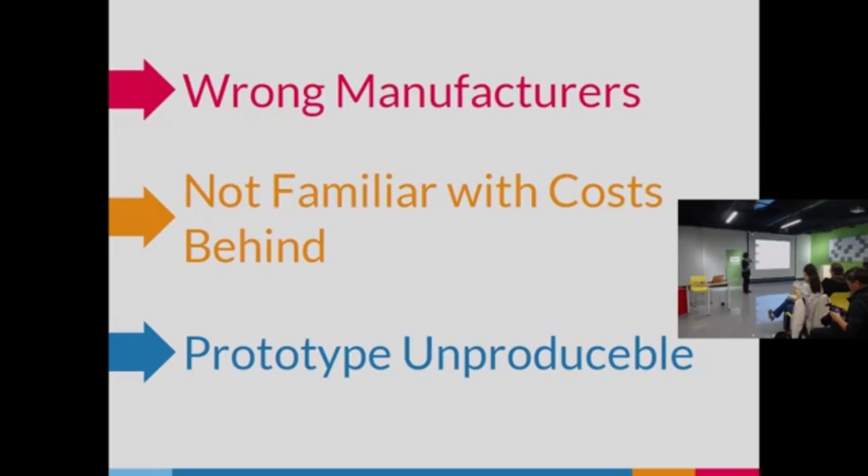There are a few possible reasons. They actually start with a small team, so from the first place they find the wrong manufacturers, they are not a good match. They are small scale, but looking for a large OEM, ODM, so it's easy for your project not to be supported. Or because the manufacturing process is unfamiliar from the start, they don't know the hidden costs behind it. Or even when they do the prototype, because prototype is not equal to manufacturing, the prototype probably will not be producible.

It's all about the scale differences. Usually starting with small teams, or they have few people, probably only focused on software, so they don't have the skill to do full stack engineering to support their hardware projects. That's why you need to find a good supplier who is actually your partner, and not just your service provider—treat them as a partner. They are the ones who control your cost, quality, and schedule.

So, having the hope that your innovation or your product will be the next big thing, what we suggest is to involve those hardware partners at an early stage, so you get better visibility on your projects. You get a next big quality product to be delivered in the market, and try to build a long-term relationship with your suppliers, because they are your first customer.

In Triple, we connect hardware startups to find different suppliers and outsourcing partners, depending on what stage you are in. If you purely have your own in-house design and are looking for OEM, ODM, we can find suppliers to fit your needs. Or if you need support to design your product, or even if you only have an idea and are looking for suppliers to do consulting or manage the rest of the project for you, we can dig out what kind of requirement or status you are in, and help you find the one that fits your needs.

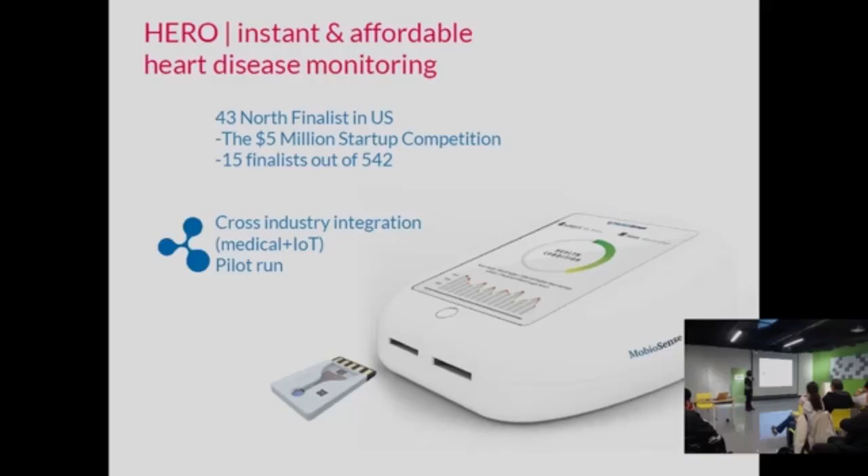And there's panoramic videos funded on Kickstarter. And there's French teams doing relaxation headsets. That's the portable heart disease monitoring; we helped them find the supplier for the chip. And there's a dart machine, transforming the traditional dart machine by adding a digital scoring system inside.

And that's the most important case I want to share with you. That's the Space Case, the most advanced smart suitcase. It's got biolock, self-scale, global tracking of your luggage, power bank, Bluetooth speakers, anti-theft function, app, and the cloud. On Kickstarter it got 920,000 pledged. And the Taiwan supplier helped them do the system integration all the way from the marketing concept to the final product. So I want to share with you a little bit about this story.

As I mentioned in the previous slide, it was very successful on Kickstarter. And that's also our first overseas case in Triple when we just started. The founders were doing traditional suitcases, but they wanted to add IoT or digital functions into their suitcase. But when our PM found this project and approached them, they had only marketing features and nothing else. So they were actually looking for a supplier to do the actual work. So they came to us, bought the ticket and visited Taiwan. Our PM helped them manage the meetings and talk to different parties.

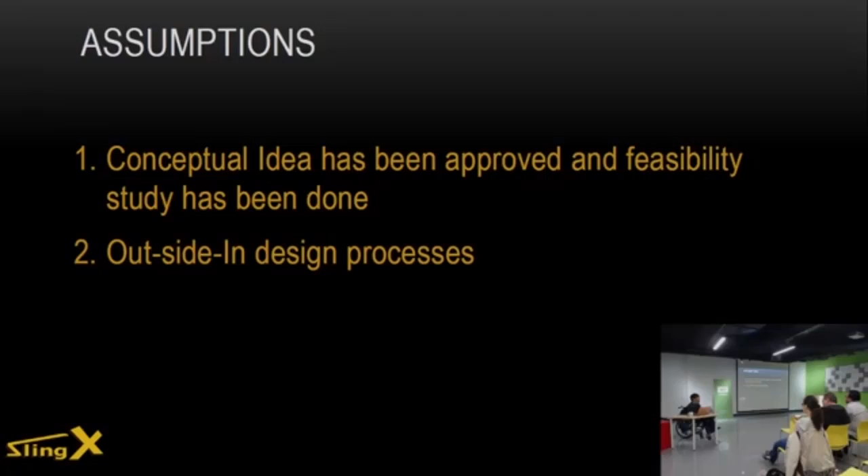But inside-out is just the contrary. We have the PCB board first. We test it and do some PoC concept, and then based on this we generate our look. Most makers take this because they like to use, for example, the Raspberry Pi or Arduino to test their concept. Then based on those modules, they try to make an ID that fits the board. But today, for the normal design process, we will use outside-in.

Okay, and this, oh, sorry.

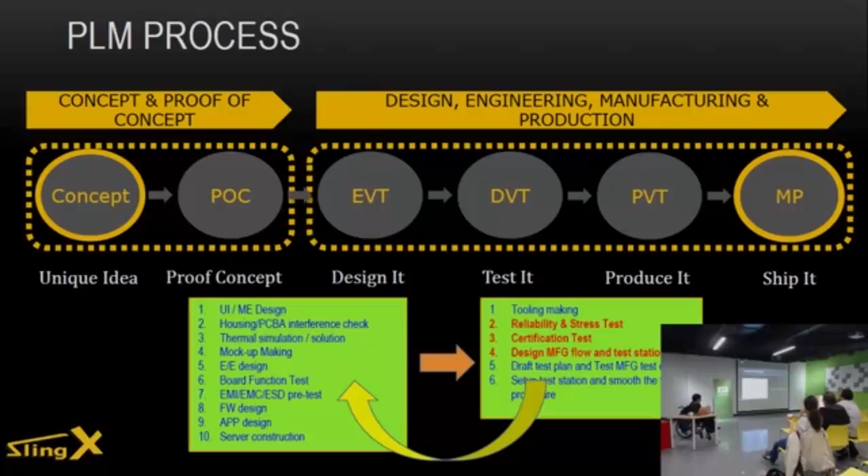I believe most of you have seen this process already, right? Some of you should be very familiar with this process, because everybody in such a session will tell you, when you design a product, you must obey this process. But this is only a process. They didn't tell you how to do that, right? You can follow PoC, EVT, DVT, PVT, but it means nothing. It just means some action. But how to do this action?

Okay, this is some action that we have to take from PoC to EVT, and this is some action to go to DVT and PVT. But right here, I want to ask one question to all of you. What's your main purpose when you design a product? Can someone tell me? Hannah, can you tell me what's your purpose when you design a product?

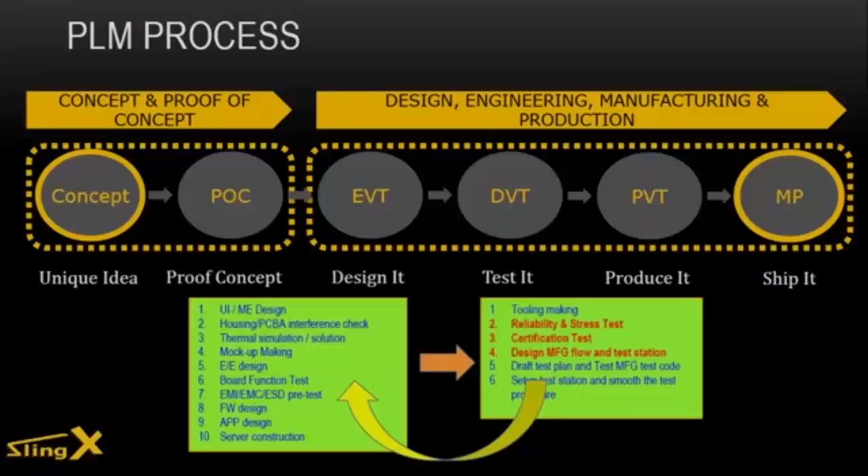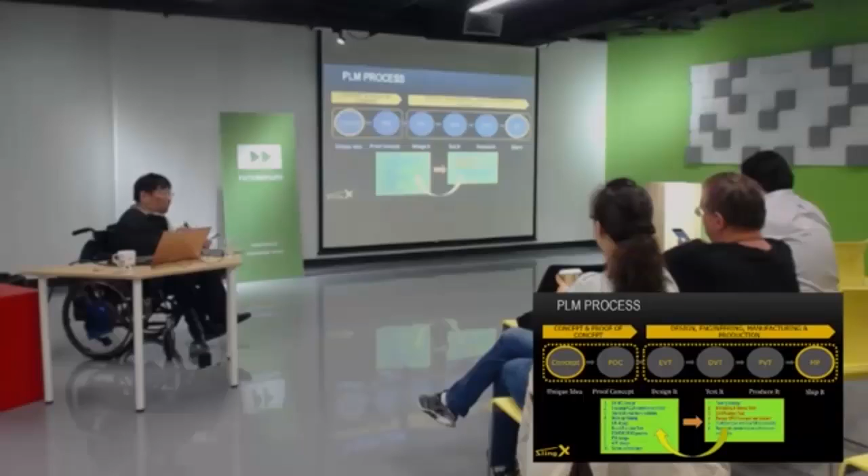So these two items, I think, are the most important for the whole design cycle. So I want to trace back from these two items, or even three items, from the manufacturer side and the market, and look back at how you design your product, and what's the major issue when you're designing a product.

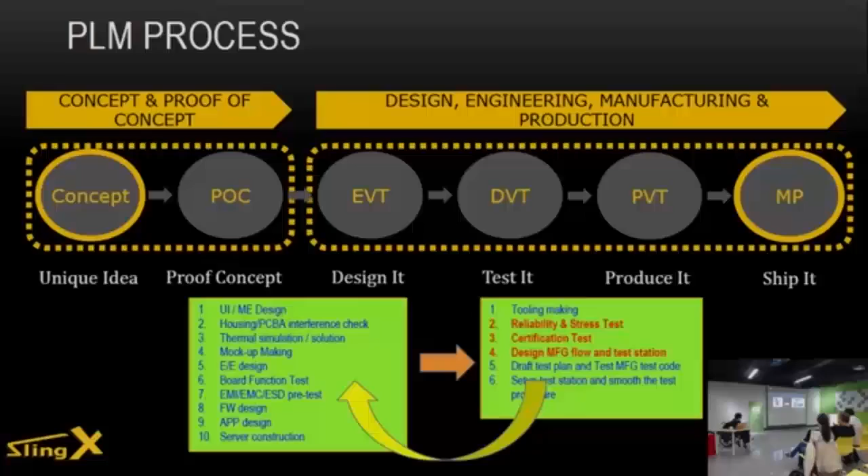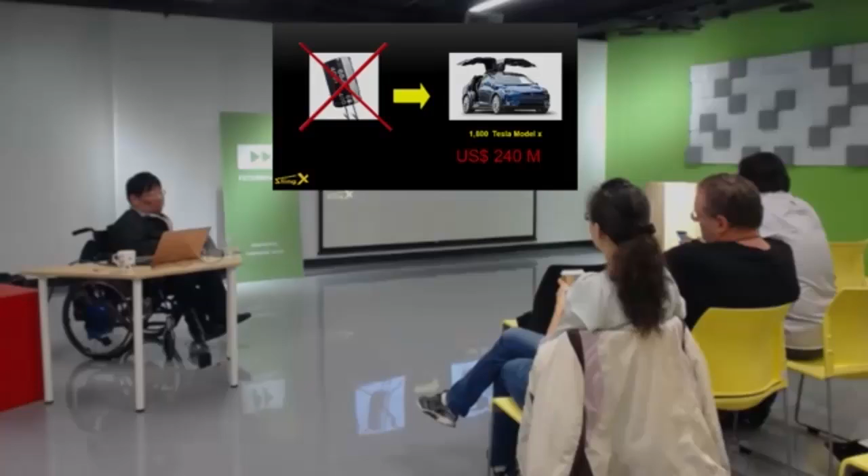Yeah. So Foxconn was fined 240 million that year. And one senior vice general manager almost quit just for this issue.

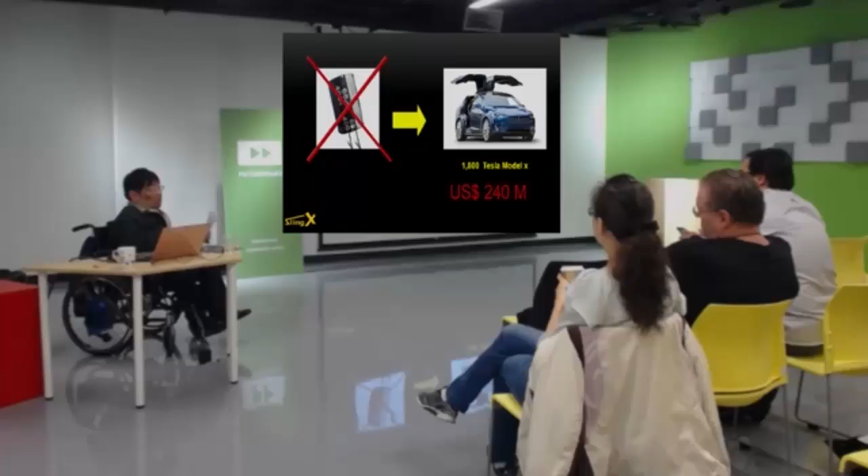And this means, because this is a concern: before shipping, we will do some reliability tests, especially thermal tests and component life tests. But for this event, at that time, Foxconn did not test this component very well. And so they got this issue after half a year. Yeah.

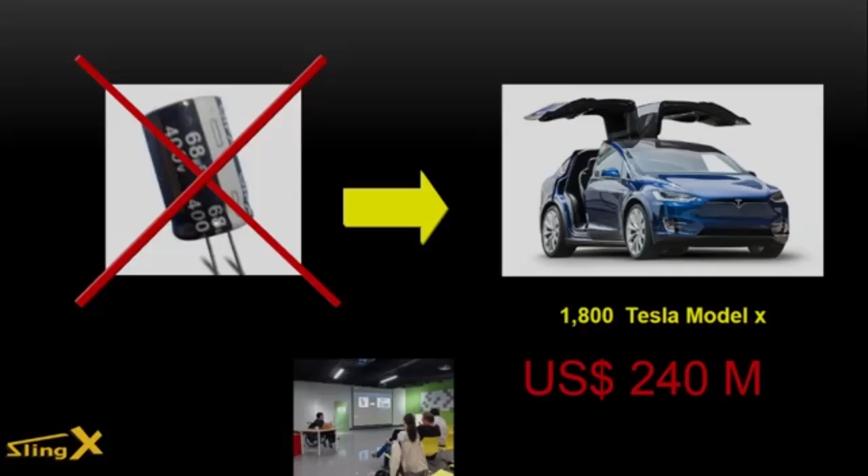Okay, let's go to the main topic. Oh, sorry. Okay, so this is what I want to discuss with you from these aspects in the design process. When you're designing a product, each item of this aspect could be a major topic to discuss for maybe one day. So today I just want to give a general scope to all of you, what we think about in designing a product, what is most important and how to think about it. Okay.

Now from here, okay. Sorry.

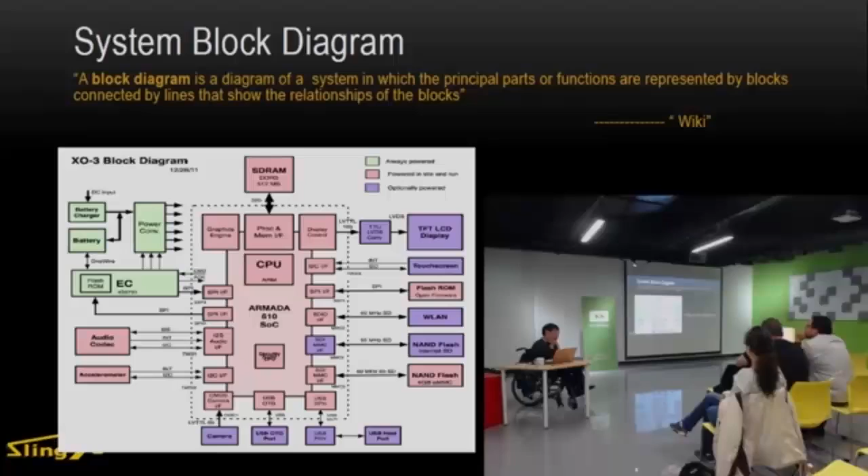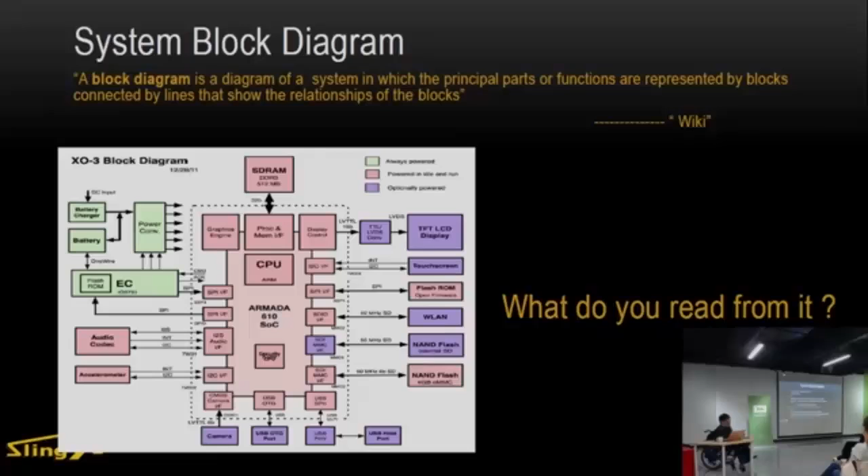First, when you design a product, you must generate a system block diagram. Why? Wait a moment, I forget. Yeah, let me see. Okay. Because when you see this block diagram, what can you read from this diagram? I think you can read at least some items listed right here.

You can list the function of each block, right? You can see right here. Here is the function of each block, and you can also see the interface, how those blocks connect, and how those blocks work with each other. And you can also see how the power goes.

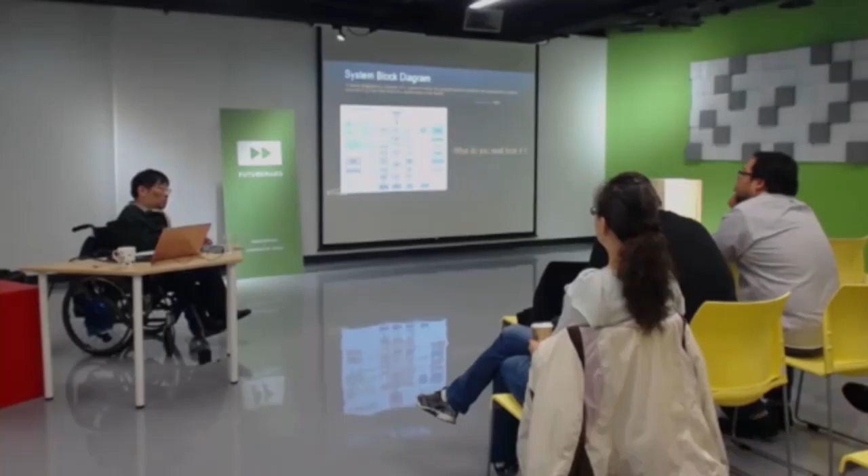So you can see the voltage, because we use different colors to show different working voltages on this system block. So it is very clear for you to talk with your engineering guys. And you can even use this block diagram to discuss with your mechanical guys, because when you design a system, the mechanical guys need to know where to put those I/O interfaces. So we can use this to talk with them about how to place them and generate a general scope of a device.

And also, you can use this block diagram to list your power budget. When we design a product, the power budget is very important to us because we need to provide sufficient power to the whole system. Otherwise, you have to do what we call an engineering change when you find out the power is not enough for your system.

This case is especially easy to find in communication systems, for example a 3G system, because for a 3G system the power consumption depends on how clear the signal is. If the signal is not so clear, it will use more power to communicate with the base station, so at that time it will consume more power. But if your power budget is not enough, you will find the system may shut down or you cannot even link.

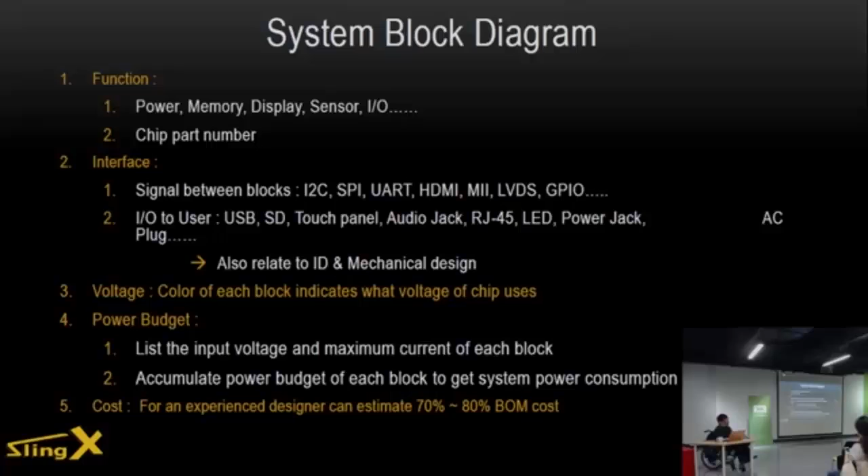The other use is when you want to have a general understanding of your cost. I think this diagram also can help you. Because by my habit, I will also list some component costs on this block diagram. So when someone asks you how much the cost of your system is, you can make a general calculation.

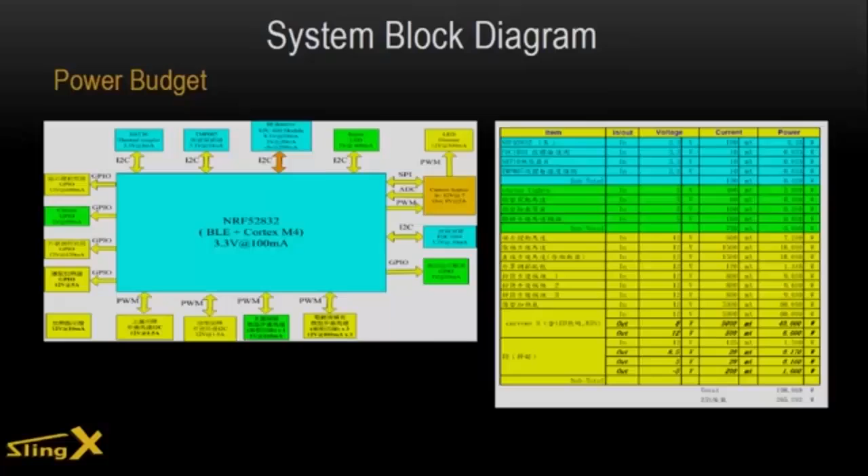This is one system block diagram. You can see the functions and the chips for each function, and we also list the power consumption right here and translate it into this table, so you can clearly know your power budget. You can even check, for example, the interfaces right here, and use this to calculate whether your system can support so many interfaces.

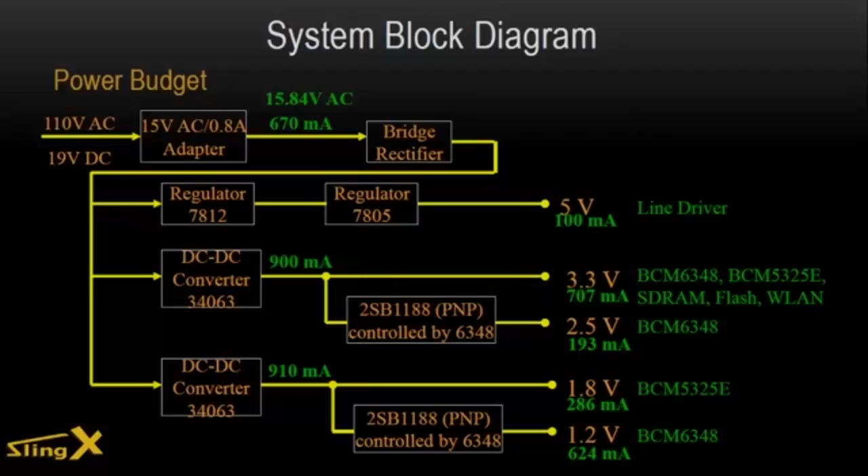This is another power budget format. This is more clear. Using this, you can even calculate the efficiency of your power system, because the power system efficiency will dominate the product's thermal performance. And for thermal, we will talk about it later.

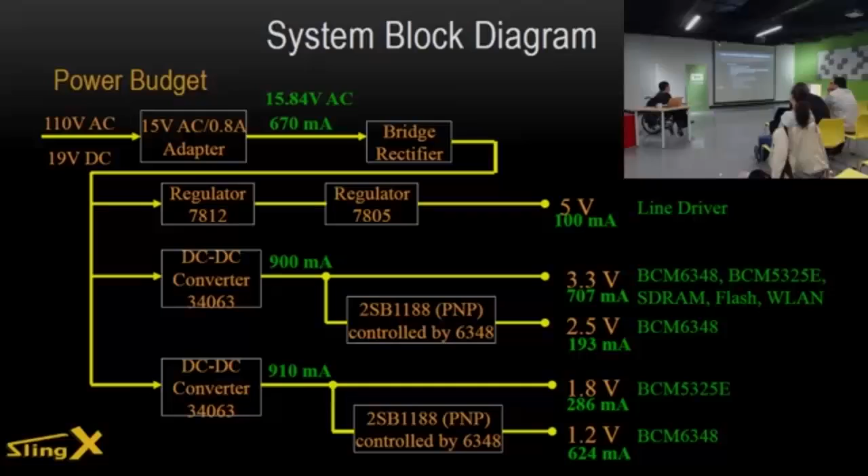Okay, this is the second chapter, usage environment. Basically, we are talking about reliability. Because the environment where the product is used will determine what kind of tests you need when you're designing a product. For example, just imagine that you live somewhere near the seashore, for example, maybe Dubai.

You live there and maybe you're running there, and have a mobile phone, just talking, or some other device. So I just want to ask you, what kind of tests do you think those devices should go through? It is very hot and close to the sea. So maybe you need to have some tests about temperature and humidity, right?

And because it's near the seashore, you will even need to do what we call a salt spray test, just to test whether the device can endure such a salty environment. And this is the environment test. This spec comes from the S company, a Japanese company.

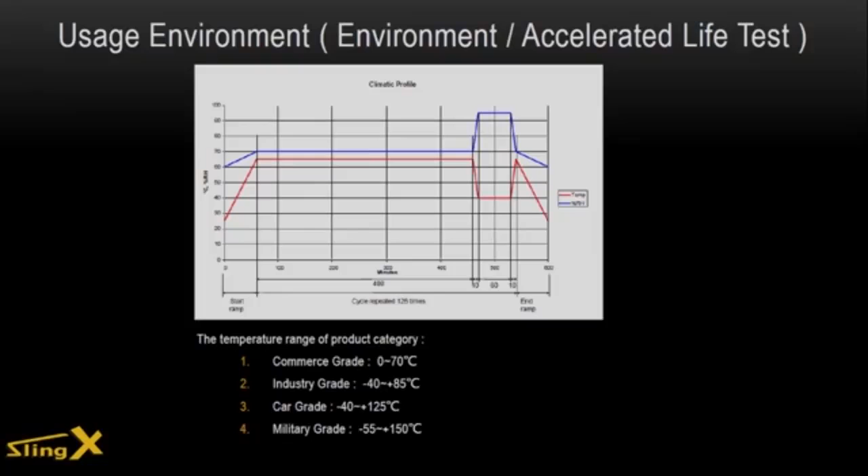Okay, right here. I also want to have some short introduction about some product categories, depending on the temperature. One is the commercial grade, and the others are the industry grade, the car grade, and the military grade. Yeah, these are the 4 kinds of product category.

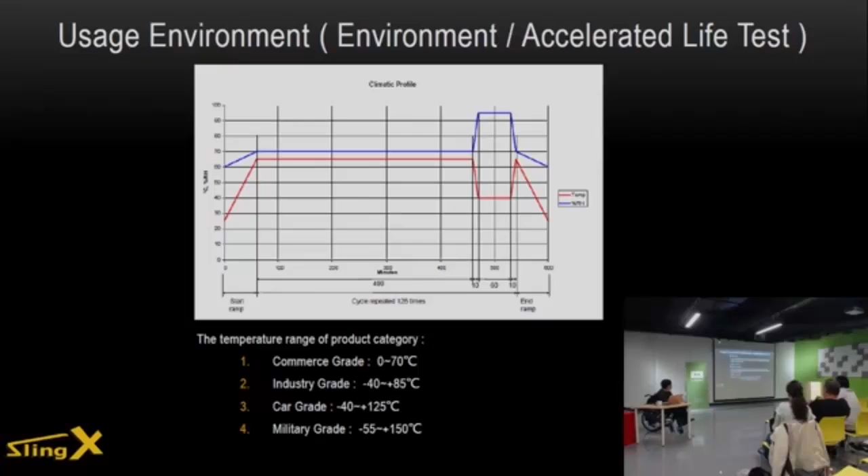And next, this is what we call a salt spray test. This is just an accelerated corrosion that produces a corrosion attack on coating samples to see whether the surface will be impacted or corroded by salt. And the next is waterproof and dustproof.

I think some of you will be very familiar with this spec, because most mobile phones right now emphasize that the phone is waterproof, or even that it can be immersed or used underwater. So they must pass this test. And for this test, we call it the IP rating.

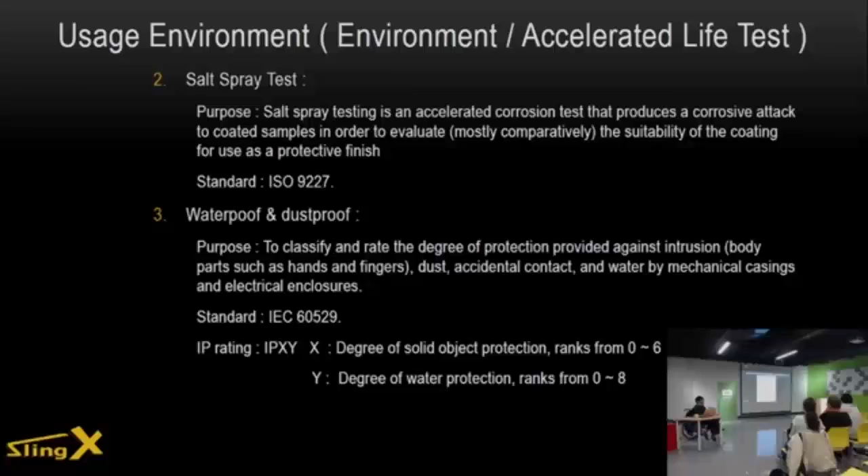For example, some Sony mobile phones are IP67. For IP67, the first number is for dustproof, and the second number is for waterproof. IP67 means no dust can get in, and it can be put underwater at 1 meter for at least 30 minutes. So we have to do a lot of such tests.

So when you design a product, your system architect should know what kind of environment this product will be sold in, and then define the environment, what kind of reliability, and what kind of tests this product should take. After you get all of that information, you can pass it to the designer, who then knows how to design your product. Otherwise, if you don't have such information, you will redesign your product many times, waste your time, waste your money, and even lose your customer.

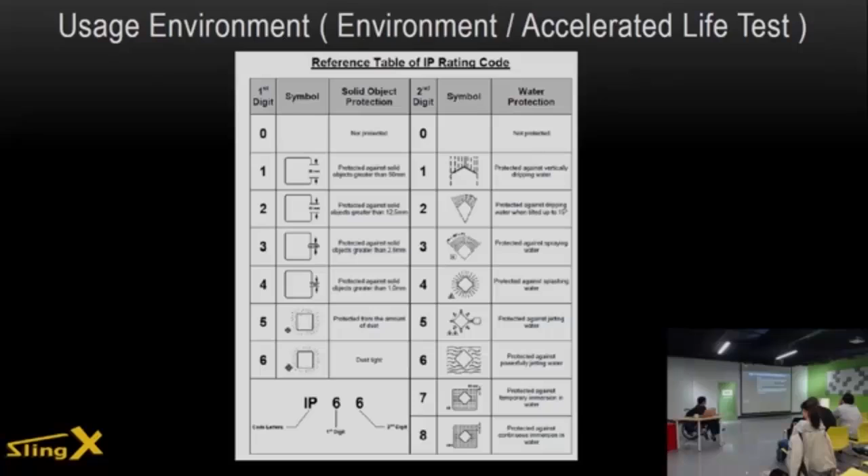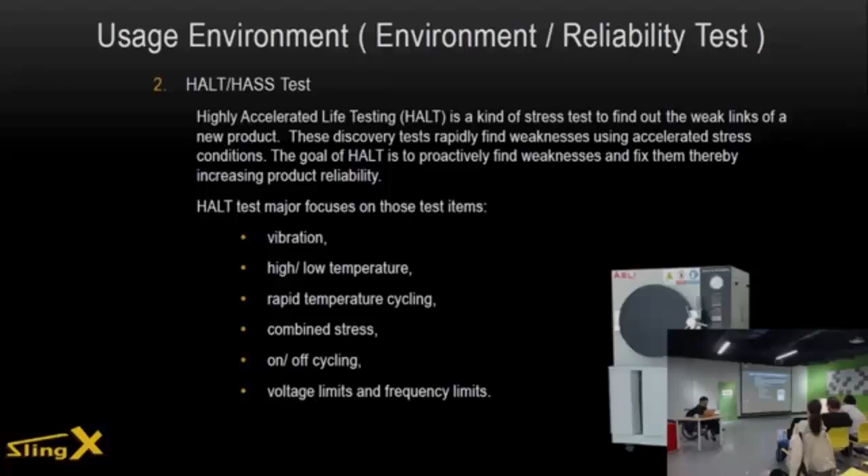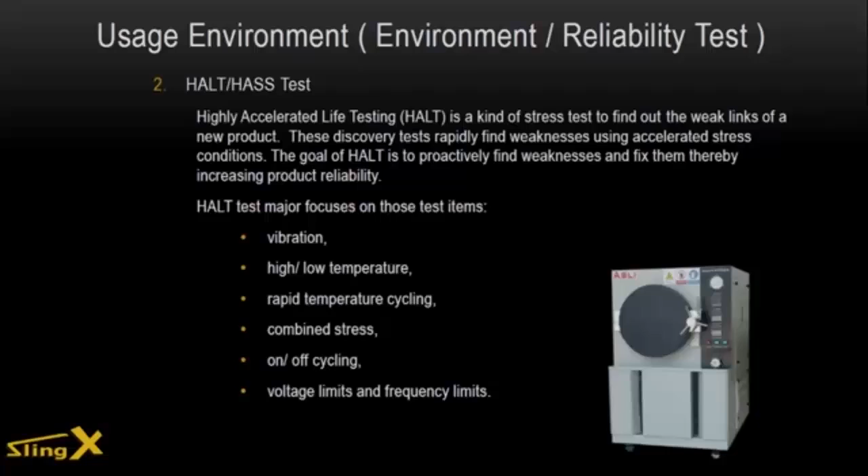Okay, this is what we call a HALT test. This test is different from the previous ones, because the previous tests are all done separately, but this is a combination test. The purpose of the HALT test is to speed up your test time. For example, temperature cycling tests sometimes take almost 1 month.

But when we design a product, as you know, the timing is shorter and shorter than before. So we are unable to endure a test that takes 1 month. We hope we can do it within just a few days, at most 1 week. So we have this HALT test to speed up your testing, and it combines vibration, high and low temperature, and even on-off cycling together, so that you can do a lot of tests at one time.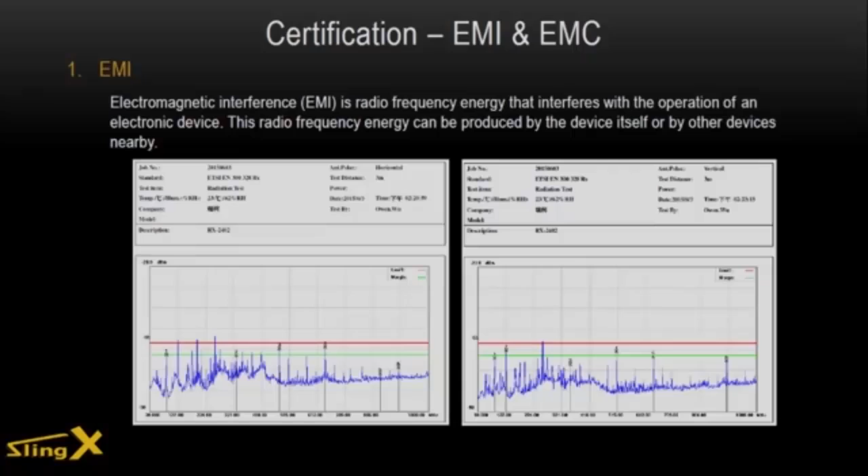This is EMI, which we call EMI. Basically, it is a radio frequency energy that will interfere with other devices. For example, any electrical device that has some frequency operating in their system must generate some radiation, a frequency radiation. So those frequencies will impact other devices. So the EMI, FCC EMI, is just trying to keep under their spec to prevent you from interfering with other devices.

So on this chart, you can see there are two lines. The red line is the upper limit, and the green line is the tolerance. Once your radio frequency is above the red line, this device will fail, and you have to try to minimize the intensity of this radio frequency to pass the test.

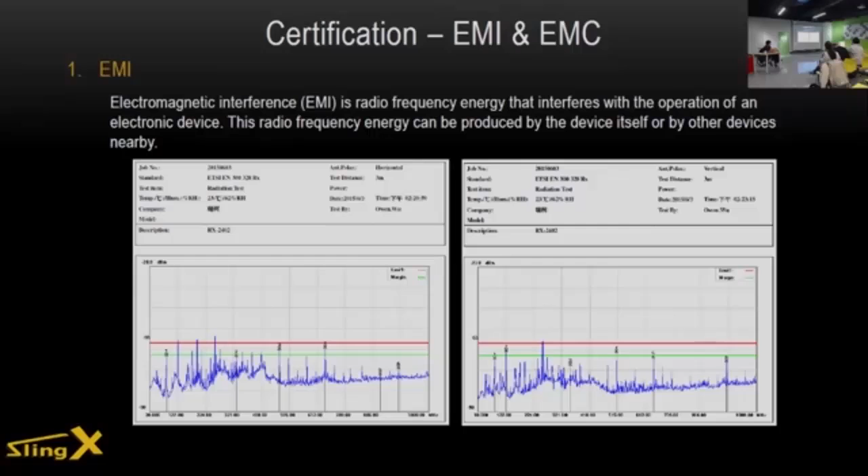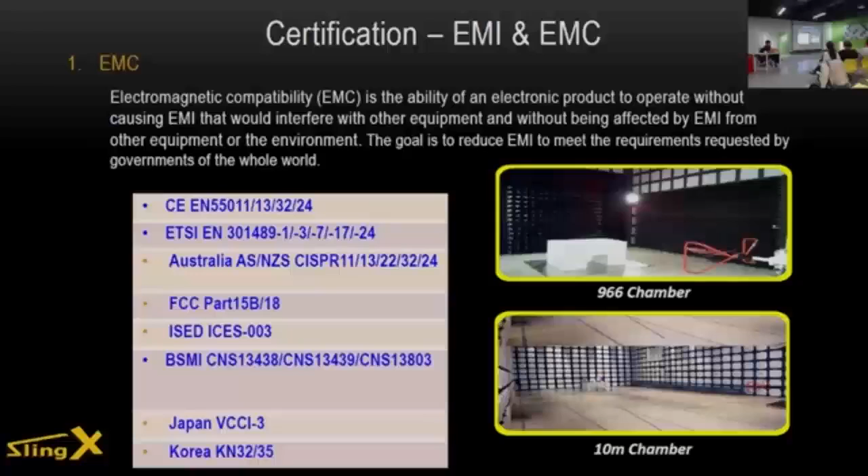This is some EMI, EMC. This is what we call a 3-meter chamber and the 10-meter chamber, and here is the standard for different countries for EMI and EMC. For Taiwan, this is Taiwan BSMI, and for US this is FCC Part 15B and 15C. It has two kinds of different specs.

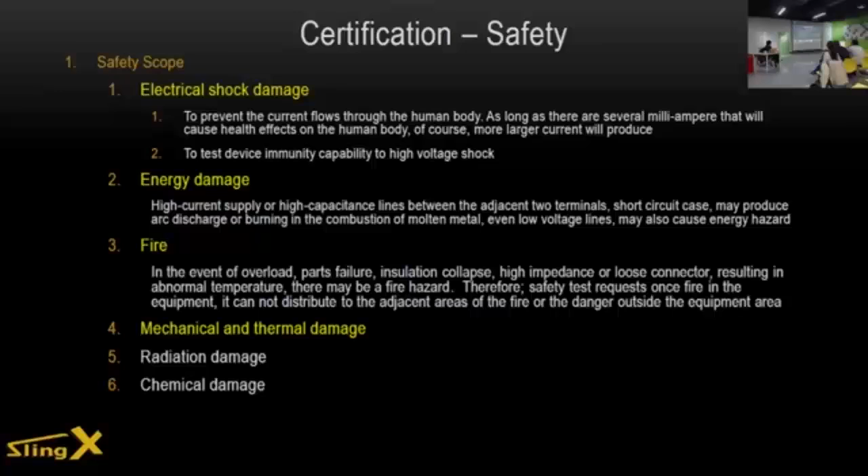And also it has some scope for mechanical and thermal damage. This is the safety sub-spec of the test standard for safety all over the world for different countries.

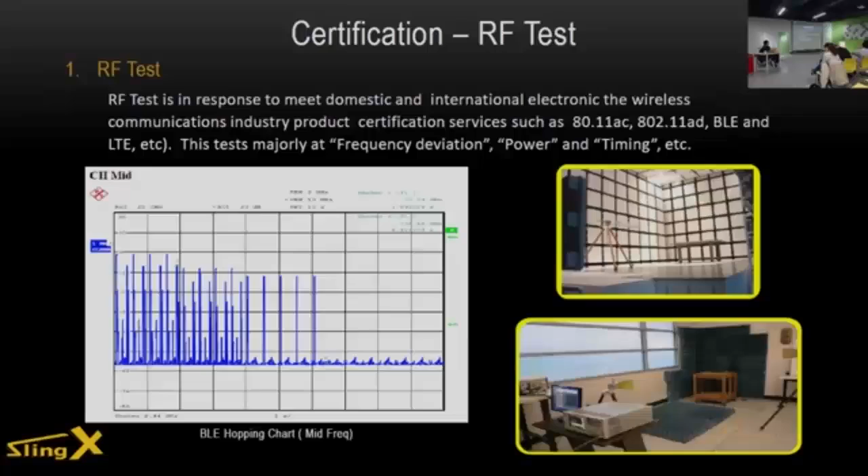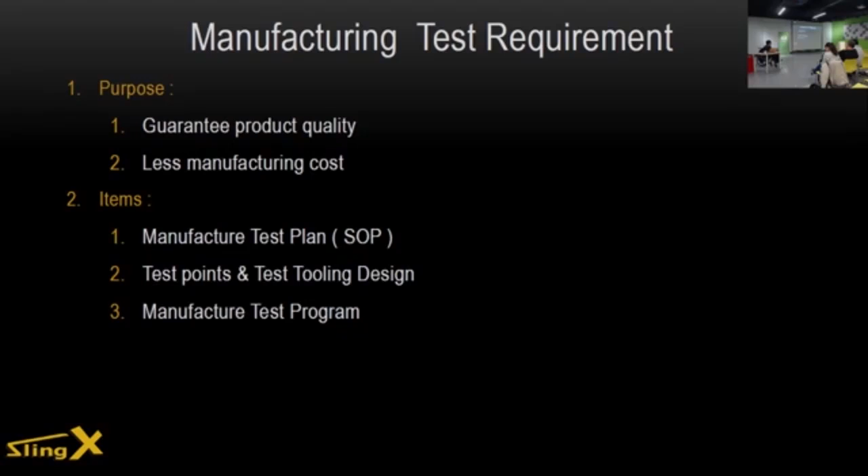Next is another important topic for you to design your product, and we will also take this into consideration in advance. This is about manufacture. When you design a system, you must know how to manufacture your product.

If you cannot put this into your consideration as early as possible, maybe after you finish testing your boards and all the functions work well, you will find one thing: it is very hard to produce at a production line. Then you must do some change so that for the production line, it can save time and process, and be smooth for them to produce.

So this is very important for you to take into consideration. For example, the purpose of this includes two items: one is to guarantee your product quality, and the other is to lessen your manufacturing cost.

For these items, basically we will have 3 items. One is SOP, which we call the manufacturer test plan. The other is what we call the test points and the test tooling design, and later we will have examples to show you. The third item is the manufacturer test program.

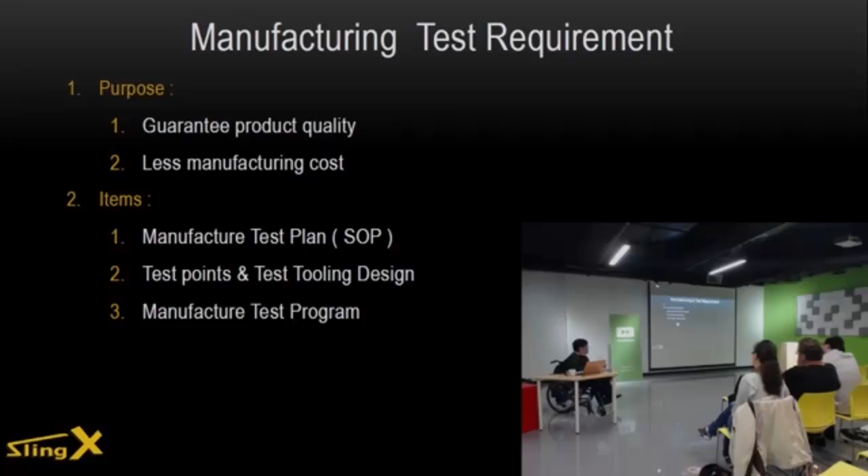And for the SOP—hello? Can someone just show this PDF file?

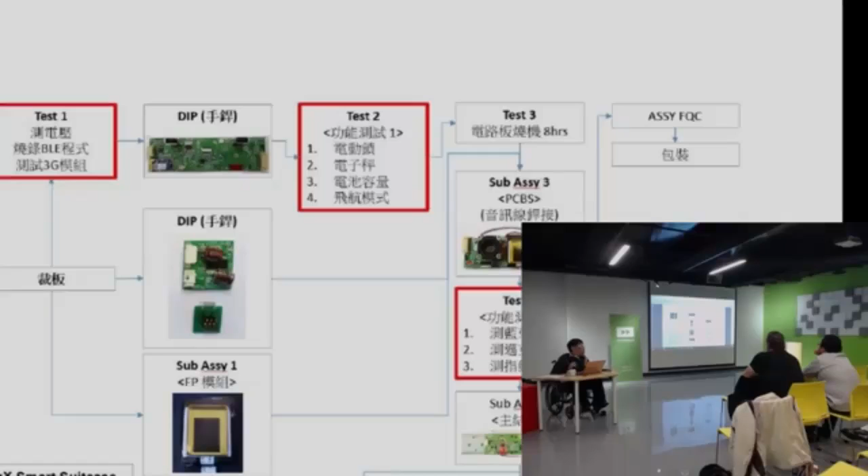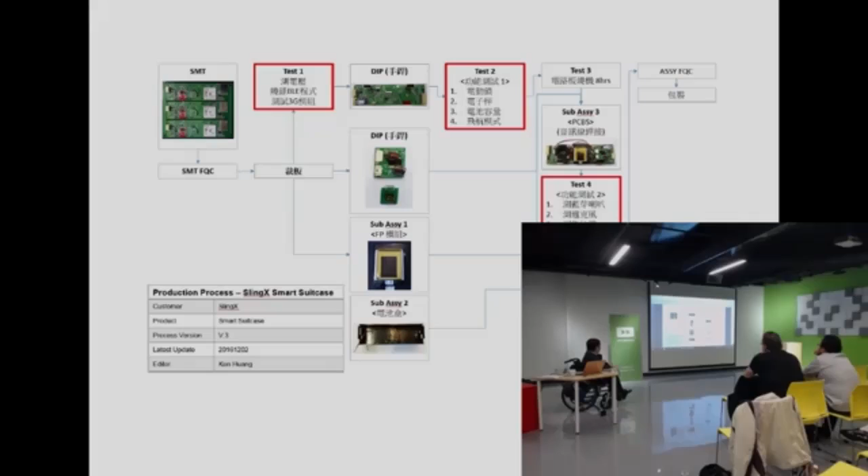For this chapter, you can see we will have some design about the test station. We call it the test station. This is a test station, this is a test station, and this is also a test station. Each test station has a different test item and different functions.

So you must take this into your consideration when you design your product—how to test in manufacture.

Yeah, and also with this SOP, you can calculate how to arrange your production line, your test station. For example, if test station 1 needs around 60 seconds to complete its test function, and test station 2 needs 30 seconds...

That means you need to double test station 1 to meet the throughput of test station 2. Otherwise, test station 2 will be the bottleneck for your mass production, and all the employees on the production line at test station 1 will wait for test station 2—or test station 2 will wait for test station 1. It's just a waste of time, a waste of your money. So this must be taken into consideration.

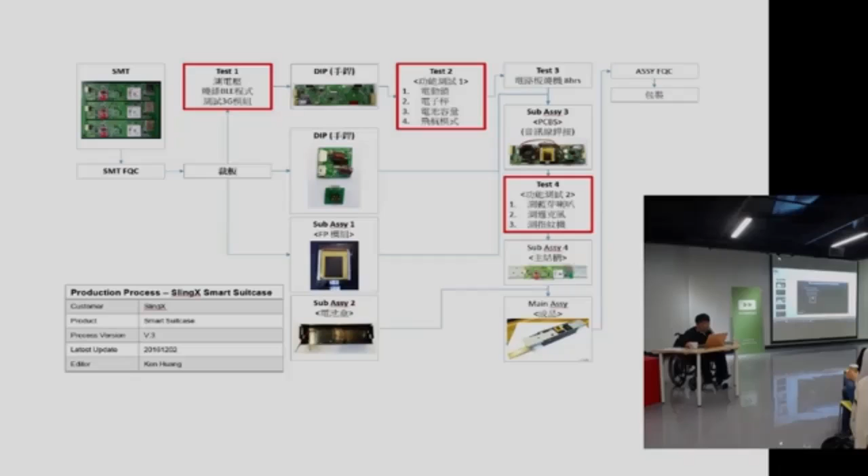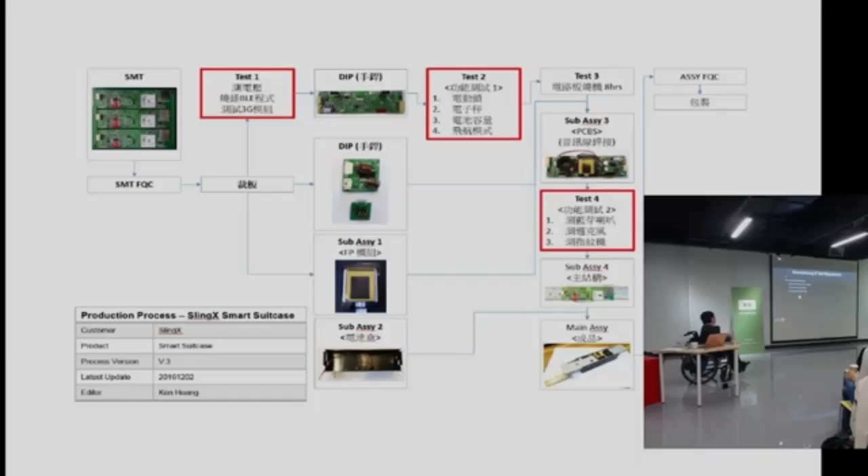And next, this is some test point and test tooling. When you design your PCB board...

Just as mentioned, once you have tagged what kind of function you need to test, you will add some test points on your PCB board in advance. And then for this PCB board, we will have another test tooling.

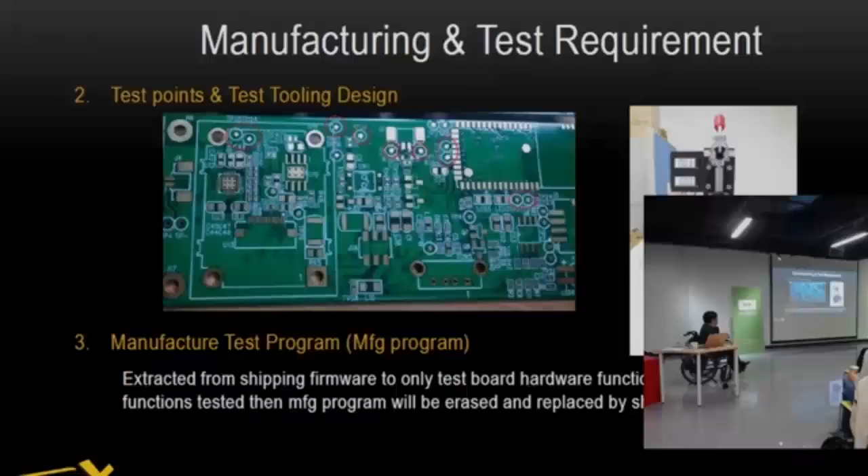We will have another test tooling, this one. So we can put the board on this tooling, and we have test pins that contact with the test points, so that you can test the PCB board very quickly—just to save your time.

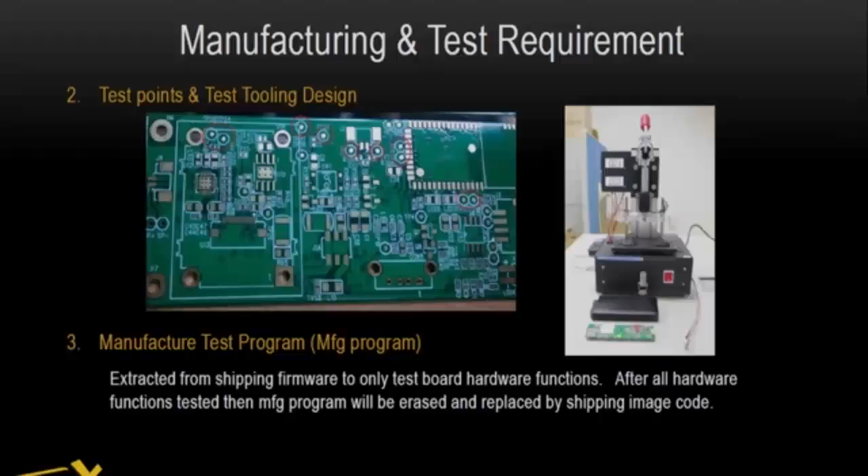And the third is what we call the manufacturer test program. The manufacturer test program is quite different to the program we call the shipping image code. Basically, let me say it this way...

The manufacturer test program is a special design, targeted at your test procedure. For the example I just showed on the SOP, if test one needs to test, for example, the power or something else, or even Bluetooth, or even other functions, the program will only focus on those functions and automatically test them directly, and it will tell you pass or fail very quickly. So it can save your time.

Maybe you will ask one thing: once my system just loads such a manufacturer test program, because we will load this program into our system, but how about after your test? How about the image program? Where does it come from?

We have two ways to handle this issue. One is we generate a program that after test will auto erase the original manufacturer test program and generate the image code you plan to ship. The other is we use another tool to erase the manufacturer test code and reprogram again. It depends on your design and cost, because the first one needs a larger flash, so your BOM cost will be higher. The second one just depends on your BOM cost and labor cost.

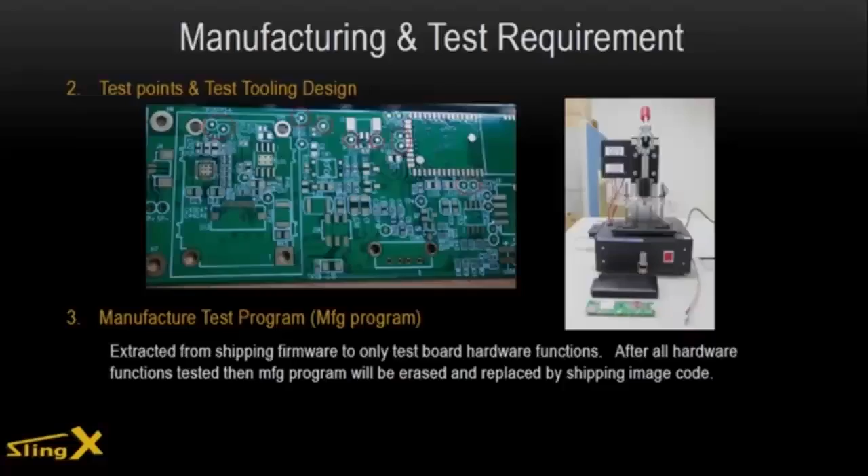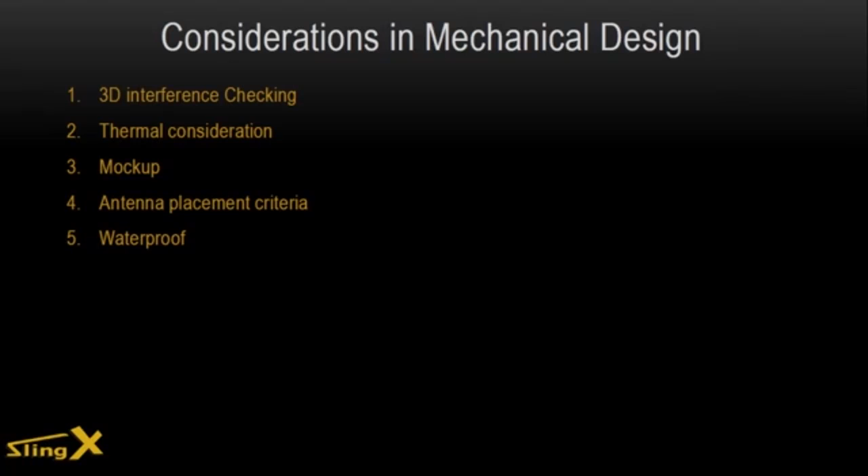This is another chapter, taking into the design in real terms. We will talk about the design for the mechanical design. Because the timing is tight, I will speak very quickly about this.

For the mechanical design, we take 5 items into consideration. First, 3D interference checking, and the other is thermal consideration, and third we will make some mockup. Also we take antenna placement into account if your system needs wireless, we consider this when making the mechanical design of the housing. And also we take into account waterproofing if the system needs it.

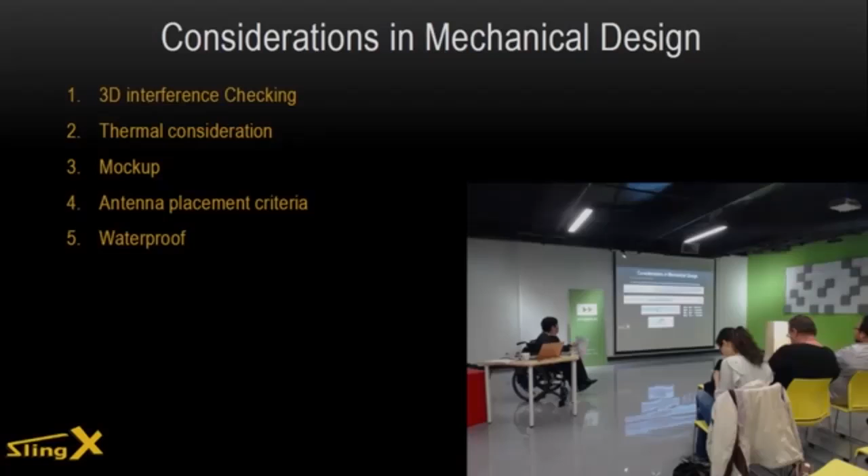For the 3D interference checking, this is one of our products. It is an electrical incense. You can see this one is very hard to design mechanically.

You can see the max outside diameter is only 16 millimeters, and the max inner diameter is only 14. It is very small, but we need to place some battery, some LED, and we also need to put the microphone and even a speaker inside this. So we need to do such a 3D interference checking, otherwise I'm not sure whether after the mechanical housing and the PCB come out, they have a conflict in real dimensions.

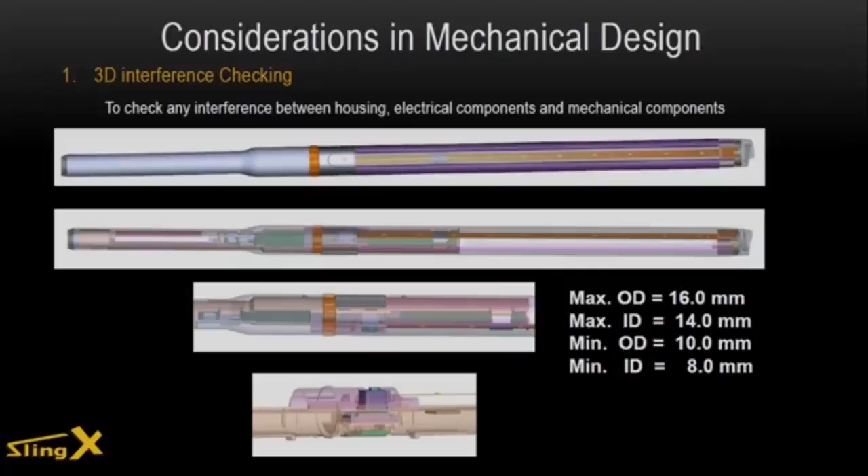So we do some simulation in the computer so you can check right here. This is the original size, and we made some parts transparent, then cut right here so you can see more clearly inside, and right here you can see it is very complicated. This is a must step for you to design your product.

The second thing we need to take into consideration is thermal. For most IoT devices, I think the thermal is okay, but for some devices that use more computing power, the system will have some thermal issues. Why do we need to solve the thermal issue? Because the thermal will lead to your whole system shutting down or something else.

Once the thermal goes high, the whole system temperature will rise up. Once the system temperature rises up, the system power efficiency will go down. When system power efficiency goes down, because the system needs so much power, the only way is it must use more current. When it uses more current, that generates more power, more thermal, and this loop, this circle, will lead to the whole system shutting down. So we need to solve such a thermal issue.

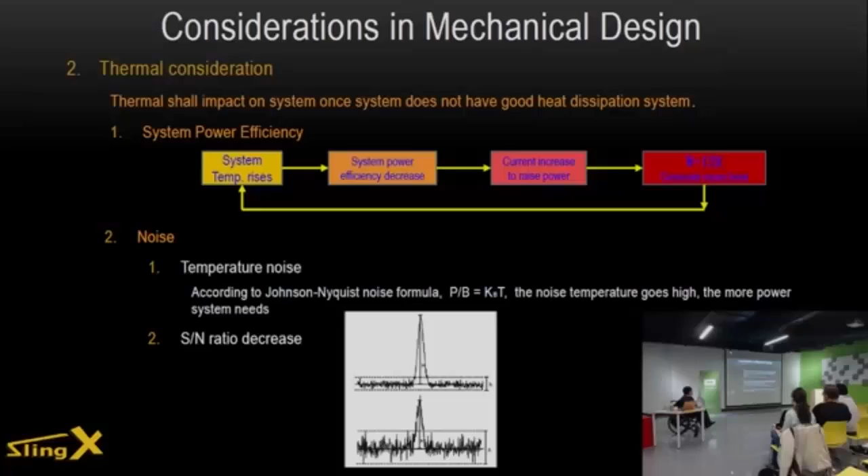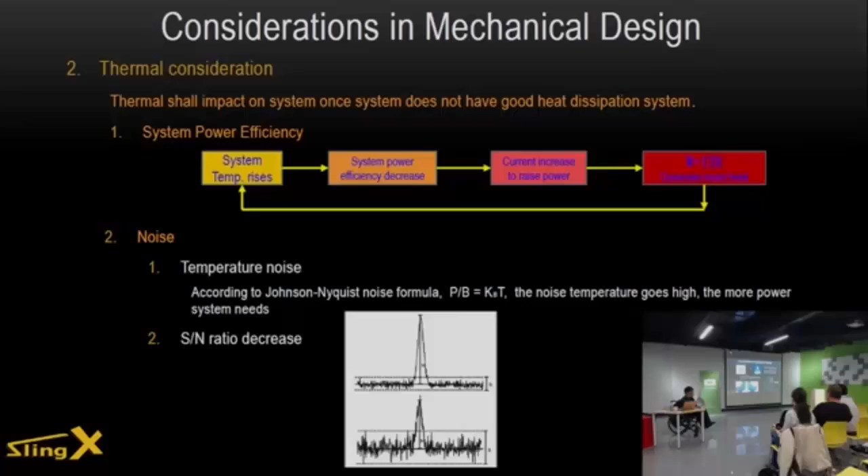For such a heat sink, it is a combination of convection, radiation, and conduction, because we call these fins. Whenever you increase the area of your fins, you will have more area for air convection to bring out your heat, and more area for radiation of your heat.

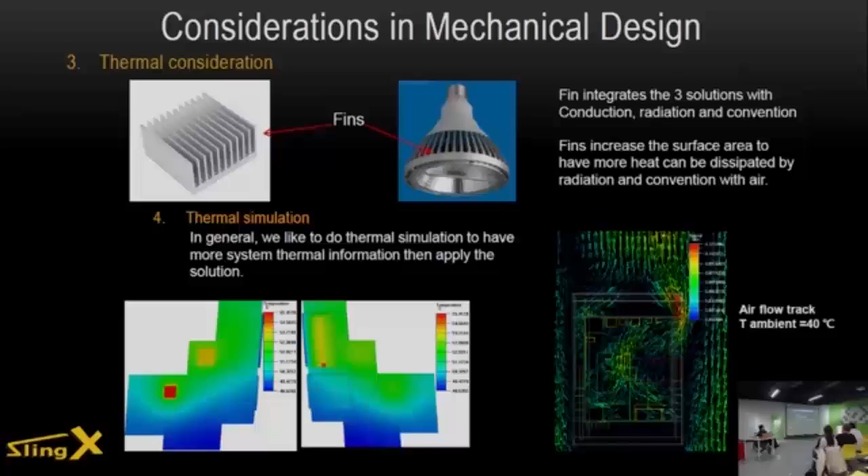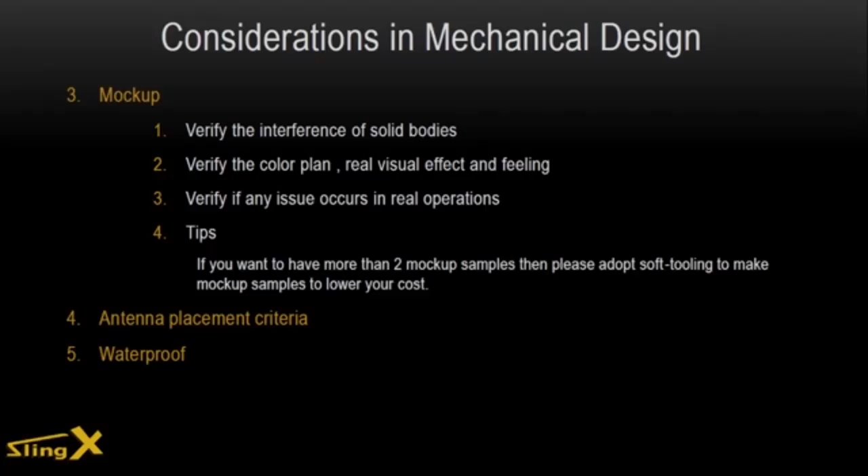Okay, and this is the issue of the mockup. The mockup is also another must step when you design a product, because the mockup can verify the interference of your solid body, verify your color plan, and give the real visual effect and feeling of whether it meets your requirement. And also it can verify if any issue occurs in real operation.

Because what we need is a working mockup, so you can use it to have a real test of whether it meets the real function. And here are some tips: if you want to do a mockup, because a mockup is not so cheap, if you need more than two pieces, we advise you to do some soft tooling and then use the soft tooling to do the mockup. It will save a lot of money for you.

And the other two items, if anybody has interest, you can ask me after this session.